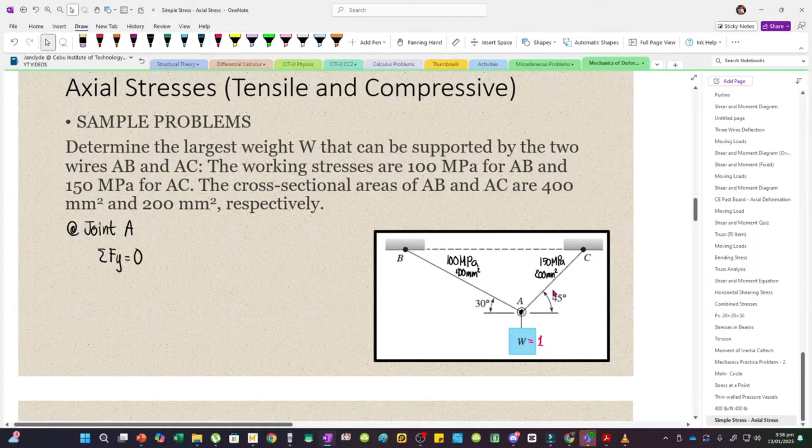We can create two equations. So, summation of forces along Y tayo, equal to 0. Now, itong AB, meron siyang vertical and horizontal component. So, sabihin natin, ito yung vertical, ito yung horizontal. Ayan. So, yung vertical component, magiging AB, and then 30 degrees yung inclination with respect to the horizontal. Ayan, 30 degrees AB. So, let's say this is ABY,

ito naman yung ABX. To obtain ABY, we can use the sine function. Kasi sine ng 30 degrees equals opposite over hypotenuse. Opposite niya is ABY. And then, ano yung hypotenuse? Hypotenuse is equal to AB. Ayan. Therefore, ABY is equal to AB sine 30.

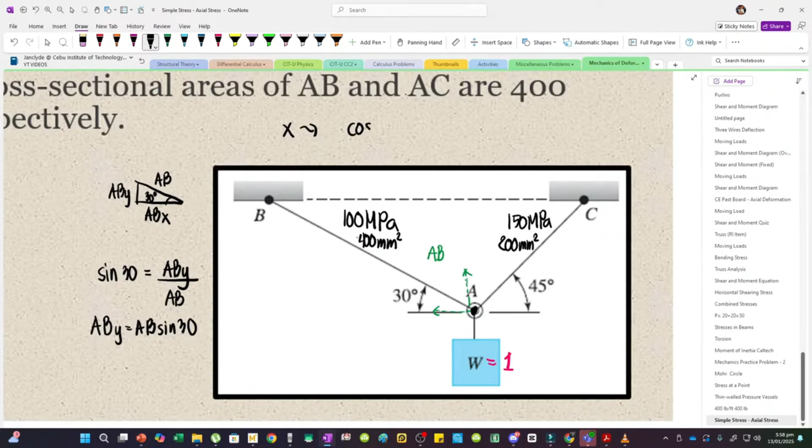So, the same lang yan. Kasi lahat ng angles natin with respect to the horizontal. Kapag yung angle mo is with respect to the horizontal, for the x component, you can just use the hypotenuse and then cosine of theta, and then for y naman, you can use sine theta. Multiply mo lang yan by the hypotenuse. Pero, kapag yung angle mo is with respect to the vertical na, mag-change yung dalawa. Mag-interchange sila. Pero ito na lang. Na-cover naman natin to sa statics.

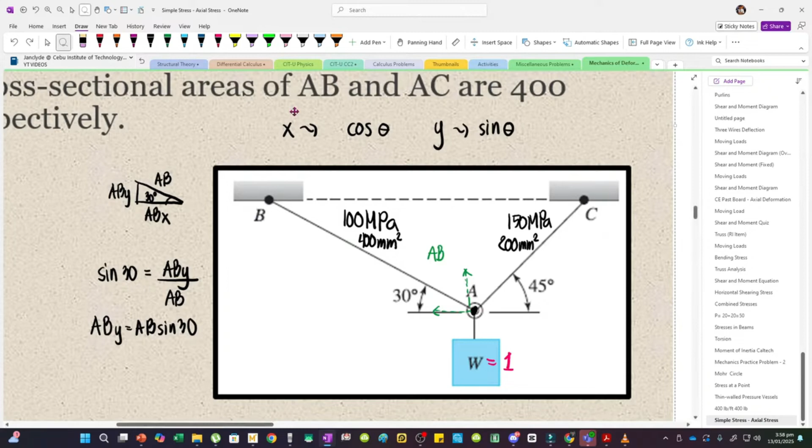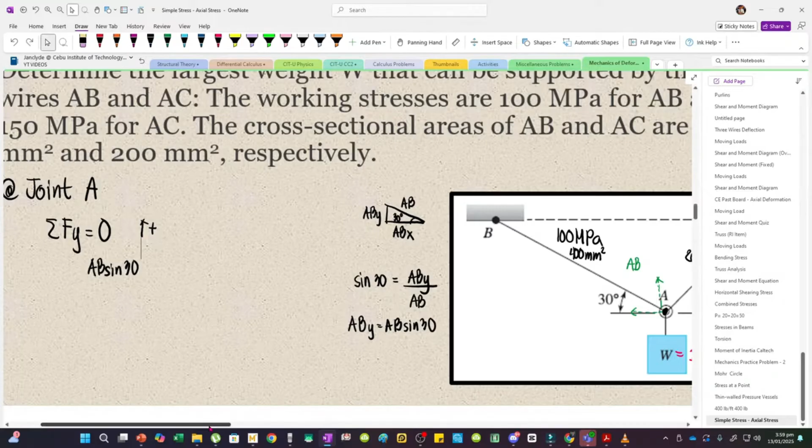Sige, so we have AB sine 30. Positive since upward yan. Upward pala is positive, ito yung convention ko. And then, sa AC naman, meron din siyang vertical and horizontal component. So, lagay ko na lang AB sine 30. Ito naman AB cosine 30. And then this is AC sine 45. Then the horizontal component is AC cosine 45.

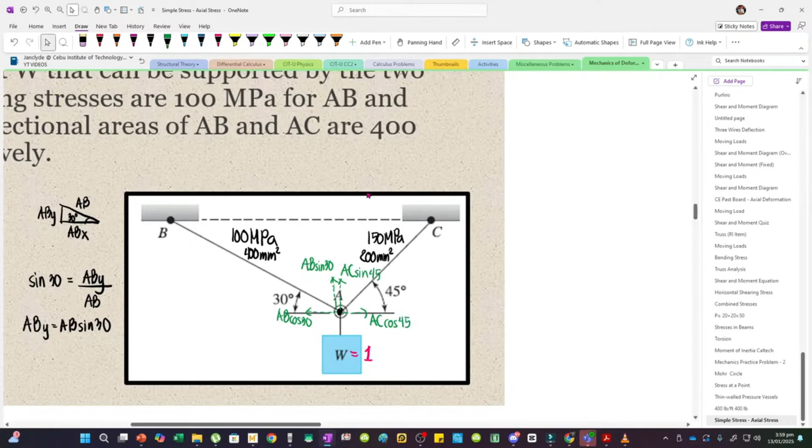Ayan. So, ito na lang yung titingnan natin. Lahat ng forces vertical, AB sin 30, and then AC sin 45, upward din. And then minus 1. Again tinreat natin yung W as 1. Equal 0. And then summation of forces along X naman, equal to 0.

We would have AB cosine 30 going to the left yan. My assumption is to the right yung positive. So, negative yung to the left. Bale, minus AB cosine 30 pala. And then, plus AC cosine 45, kasi to the right yan. Equate to 0, kasi walang horizontal force na nag-act.

So, yung gagawin mo is meron tayong dalawang unknowns. Unknown yung AB, unknown din yung AC. So, gagamitin na lang natin yung function ng calculator which can solve two unknowns. So, dito ka sa mode and then equation, press 5. Then, dito tayo sa 1. AX plus BY equals C. So, again ito yung form.

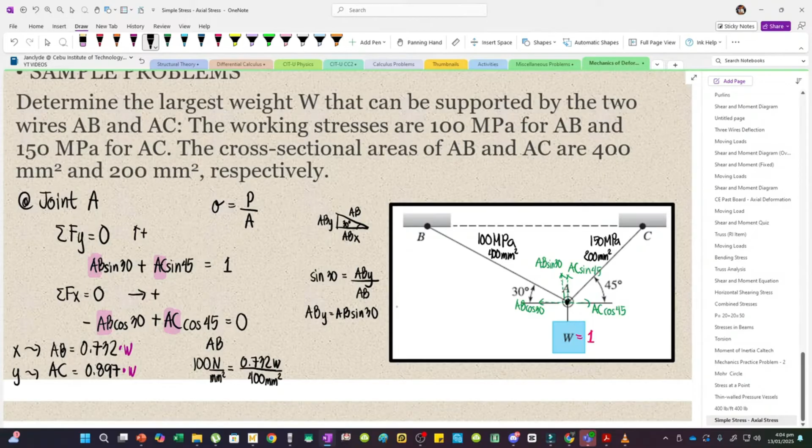So, we would have dito na lang 100 times 400 divided by 0.732, or pwede kang gumamit ng shift solve, depende na yan sa preference mo, press equals, we would have 54,644.8 newtons. Ito yung weight na makakaya ng AB. Lagyan na lang natin ng subscript. 54,644.81 newtons. And then for AC naman, working stress niya is 150.

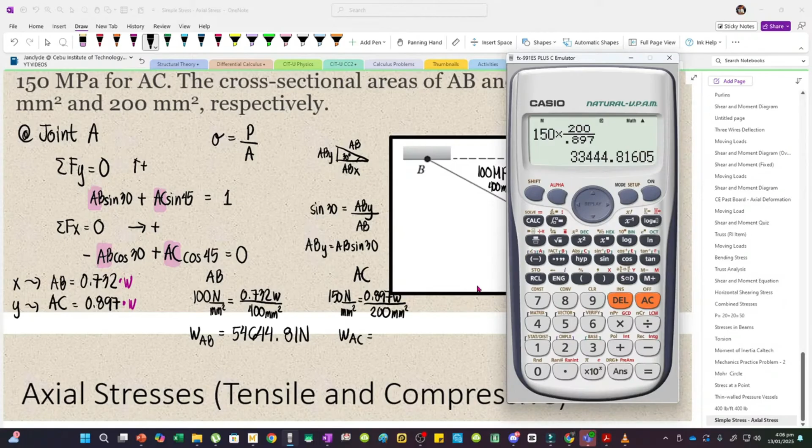So 150 newton per mm squared. And then equals, yung kine-carry ng AC is parang 89.7% ng W. So 0.897 W divided by the area. Area is 200 lang mm squared. So yung makakaya ng AC, this would be 150 times 200 divided by 0.897. So 33,444.82, naka-newtons.